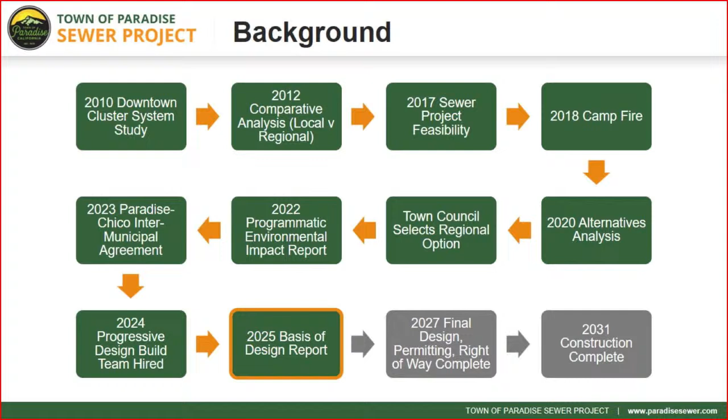At the December 10th council meeting, we provided a slide showing really the last 12 to 15 years of project development activities, bringing us to this 2025 basis of design report. For the purposes of introducing today's presentation, I'm going to spend some time on what brought us to this moment, in advance of hiring our PDB team and preparing the BODR.

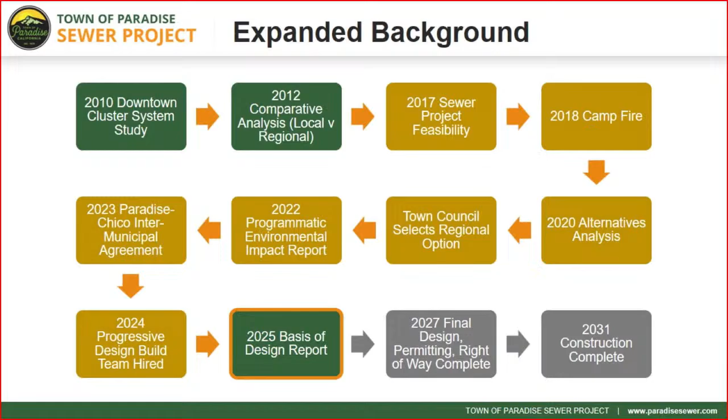For numerous years, we've been showing this slide to our funding partners and project stakeholders, City of Chico, Butte-Lafco, Butte County, to showcase just how studied and how important this project is to the Town of Paradise. For the greater part of the last 40 years, this has been our most important project in the Town of Paradise.

Some key definitions, so we're all talking the same language. The Paradise Sewer Project's overall goal is to provide a long-term solution for the collection, treatment, and dispersal of wastewater from parcels identified in the sewer service area. That sewer service area is described here by pretty much the areas encompassed by Clark Road, Skyway, and Pearson Road, mapped to the right here in orange.

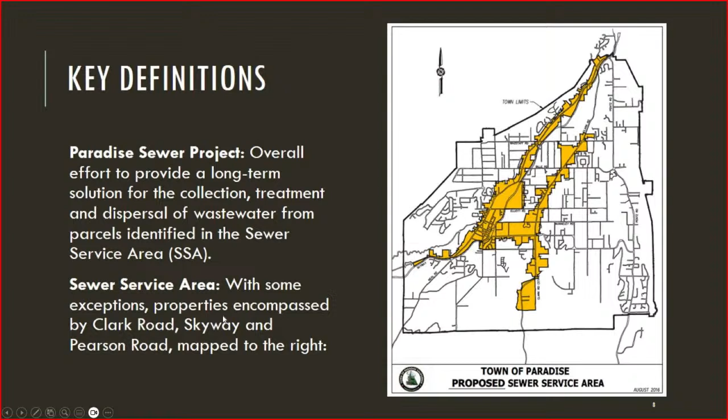Our goal was to determine a funding subsidy or grant from the state or federal level which was not currently advertised or available, to ensure the project could be advanced. The 2017 feasibility study outcome was to pursue both local and regional sewer project versions to maximize the benefit to the town at the lowest cost, even knowing we did not have a funding source identified or confirmed at that time.

A lot can be said about the 2018 Camp Fire, but in the lens of the Camp Fire and post-Camp Fire recovery, our community long-term recovery plan identifies the Paradise Sewer Project as one of the most critical projects affecting the long-term recovery of our community. It reaffirms the importance of this project to improve groundwater quality and environmental conditions, restoring affordable housing to Paradise, and removing a major barrier for commercial recovery.

With that in mind, in 2020 the Paradise Town Council voted to again undertake a review of alternatives, reconsidering a potential local versus regional approach in the post-Camp Fire lens for the project. The next couple of slides I'll summarize briefly. There's a lot of information, but that 2020 effort really does set the stage for how the project was evaluated and how we arrive here today.

The Paradise Sewer Project essentially has three different choices at its basis for how it could move forward: we either don't advance the project, or we utilize a local treatment plant, or we look at a regional connection with the City of Chico. Amongst those local treatment plant options, there are different types and methods to treat and dispose of the wastewater.

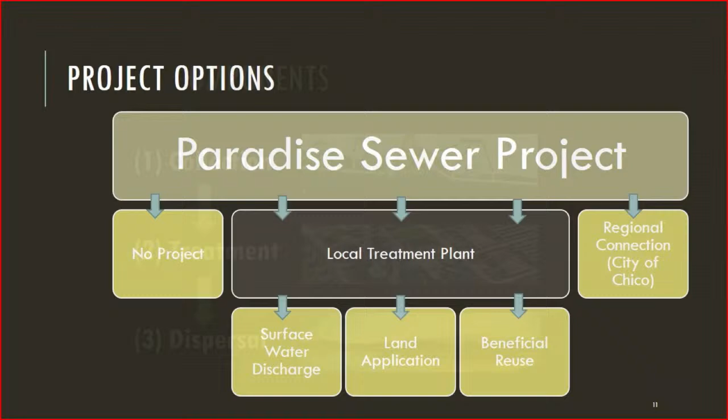With that, you have surface water discharge, land application, and potential for beneficial reuse. So what defines a complete project? It is one that includes the collection, treatment, and dispersal. Because the town of Paradise does not have any major water bodies within it, dispersal has always been a major challenge, which really did steer the project towards a regional approach with the City of Chico's water pollution control plant already in existence.

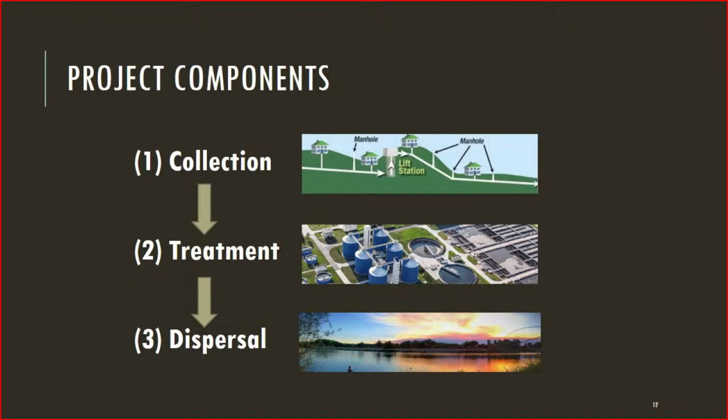Our 2020 alternatives analysis matrix looked at regional versus local from five different criteria: economic, social, environmental, implementation, and operational.

I'll summarize from the economic status. We looked at local, which we even described as the Miocene Canal alternative, a third alternative discussed about collecting and exporting the wastewater out towards the Miocene Canal. But really the primary focus in the two competing alternatives in this study was local versus regional. From the economic perspective, it was pretty close, but the regional option was more beneficial to the town of Paradise when you consider the long-range operations and maintenance cost of the project.

As far as the social impacts, what does that mean? It means impacts to the community during construction, or permanent impacts to the community, whether that be visual, noise, or odor, change in public recreational access, and then ongoing monitoring or mitigation required. The regional option scored the highest for this one as well.

When it comes to environmental benefits, regional was also selected as the preferred alternative, or at least the highest scoring criteria, because of the simplicity of permitting, potential to avoid resources, and predictability of obtaining a permit, as some agencies are more difficult and unpredictable when it comes to issuing a permit for new wastewater discharges, and that remains true today.

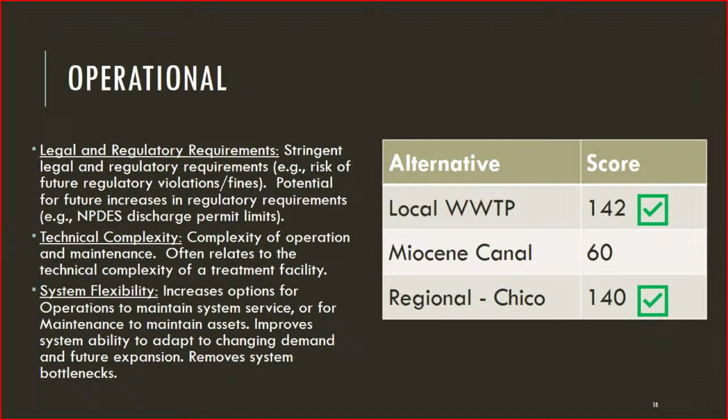As far as operational, both local and regional present pros and cons, as we've seen in the development of the EIR and information you'll see in the basis of design report for the regional option. Operating and maintaining a wastewater treatment plant, or leveraging an existing one, requires significant effort and responsibility in managing this wastewater. So in our 2020 analysis, it scored local versus regional as balanced or equal. When the ultimate scoring was tallied up and presented to the Paradise Town Council at the time, the regional option scored the highest, and that was the one selected.

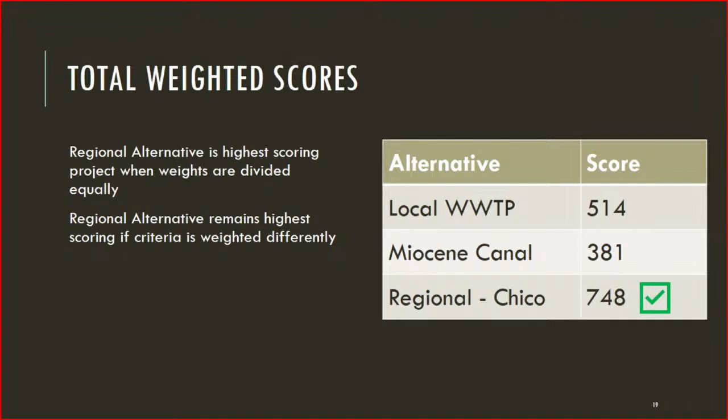The reasons behind that: it was the lowest capital and net present value costs, it had the lowest community impacts during and after construction, the least probable environmental impacts, and it was going to be the easiest to implement. As far as operational, it was least complicated to operate and benefits from potentially leveraging experienced Chico staff. This direction was approved by the Town Council in December of 2020.

So when it comes to next steps after that alternatives analysis, the Sewer Regionalization Project Advisory Committee was formed. This was comprised of the mayor and vice mayor at the time between the Town of Paradise and City of Chico. The role of this advisory committee was to develop the principles of agreement for the city to provide the town with wastewater treatment services. The committee was also purposed to monitor overall progress of the project, including the EIR process and the associated public comment periods, as well as provide updates and recommendations back to the two councils.

I'll note here, this was also facilitated by the Regional Water Quality Control Board, including involving Clint Snyder, who I mentioned earlier is on the call today.

As far as the accomplishments of that committee, they successfully supported public outreach as a complement to the environmental impact report. They approved the principles agreement between the Town of Paradise and the City of Chico, which then fed into identifying a connection payment to the City of Chico required to be paid from the town as compensation for the value of their water pollution control plant, as well as the capacity we would be requiring. From there, we approved the intermunicipal agreement, which was the City of Chico's way in their municipal code of how regionalization comes to fruition if they so chose.

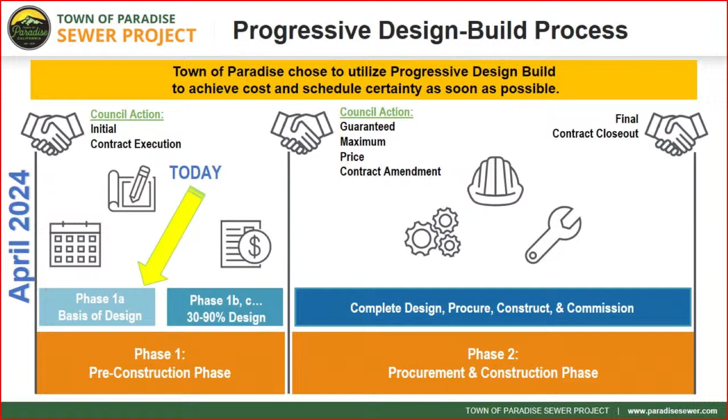With that, it is my pleasure to introduce the Carollo team again to present the findings of their basis of design report underneath the work completed by Mountain Cascade Incorporated. So with that, I'll introduce Randy Buckman.

Good afternoon, my name is Randy Buckman with Mountain Cascade. I am the project manager for the Progressive Design Build team. I'd like to start by thanking the council for having us here today and allowing us to present our findings in the BODR, and also thank the town staff, especially Jim Goodwin, Mark Maddox, and Colin Nelson.

Thank you for their support over the last year as we have progressed, not only entering into contract, as Scott knows, we were able to enter into a contract relatively quickly. I think it took us two months when usually this process would take four to six months.

And as Mark said, in a short period of 10 months, we were able to deliver the BODR. I'd also like to acknowledge the engagement from our project team partners and stakeholders: PG&E, the City of Chico, Butte County, and PID, as well as the people from the Progressive Design Build team who aren't here. We have a large number of staff committed to this project from both Carollo and Mountain Cascade, as well as our subcontract partners Fugro, Rolls Anderson Rolls, and Crawford and Associates. With that, I'd like to introduce Beverly Hahn, the Assistant Project Manager with Carollo, who will kick off the rest of the presentation.

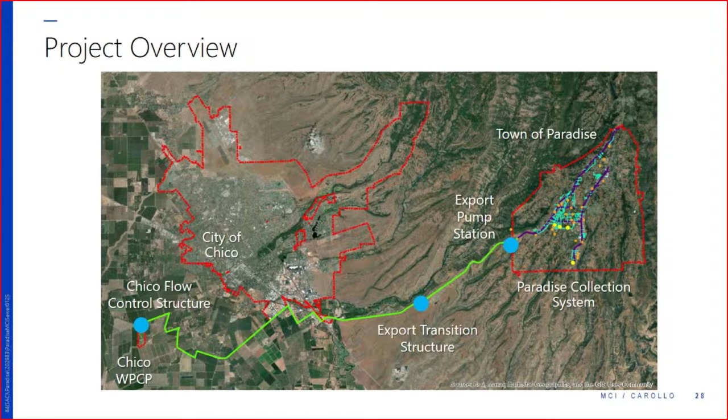So that creates a forced gravity system to the Chico plant, which is great because it avoids a lot of pump stations, but does create some design challenges since it pushes flow at a very high pressure to the plant. So at the Chico plant, there is a flow control structure that serves to reduce that pressure before it enters the plant.

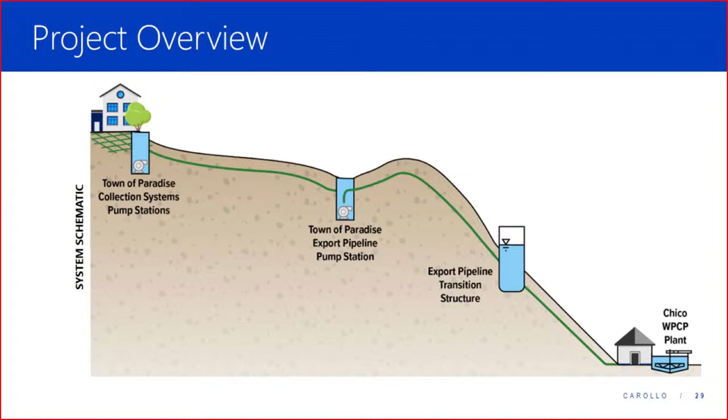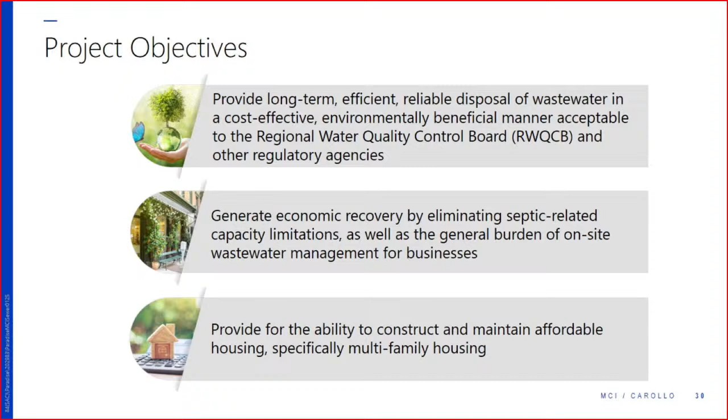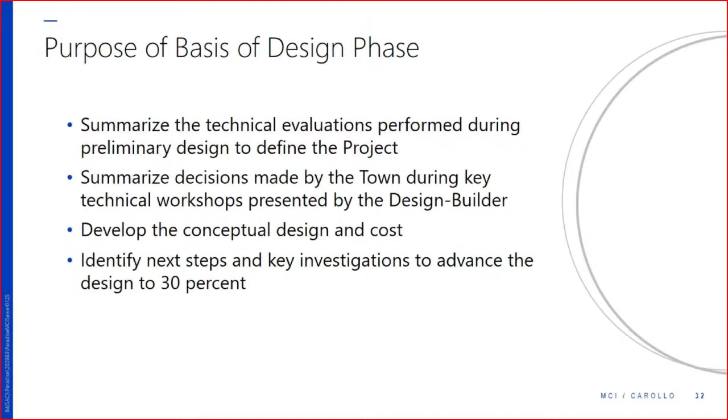Just a couple of quick highlights. We did start in March and wrap up in December, so it took us 10 months, which is kind of an expedited schedule for a project this large.

We had 2 parallel teams in place to make this happen so quickly, both with targeted expertise—one for the collection system and one for the export pipeline and Chico connection. Both teams worked closely together. Darren Bowney will talk about the collection system stuff, and John Marshall, who's not here today, led the export pipeline work.

There were 12 technical workshops with the town, tons of meetings, a bunch of field investigation effort, and some advanced hydraulic modeling. We'll talk about the collection system modeling—that model helped confirm in detail what kind of flow could be expected to enter the system, which sets the basis for our design. There was also a separate hydraulic model prepared to optimize the export pipeline configuration.

Development of key design criteria—Randy talked about the utility and agency. There was a lot of utility and agency coordination along the way, and then the updated construction schedule and cost estimate as part of the work.

So just a quick overview of the collection system. This graphic shows the conceptual design developed during the basis of design phase. The flow travels from high up on the hill along Skyway, north to south based on the blue arrows, and also down Clark. Then it's lifted from the bottom of Clark up to Pearson, where it flows across town over to Skyway. The collection system is made up of sewer laterals that connect homes to collector pipelines within the town.

Trunk sewers, shown in green, are the main primary pipelines within the collection system. Their job is to convey the flow down to the export pipeline, which is not shown on this graphic but is on the lower left side of the screen at Skyway.

The collection system consists of 29 small pump stations to lift flow from low elevation neighborhoods up to the trunk lines, and also about 4 trunk line pump stations, which are larger pump stations along the green pipelines. Their job is to lift flow into the trunk pipelines where the sewer flows downhill.

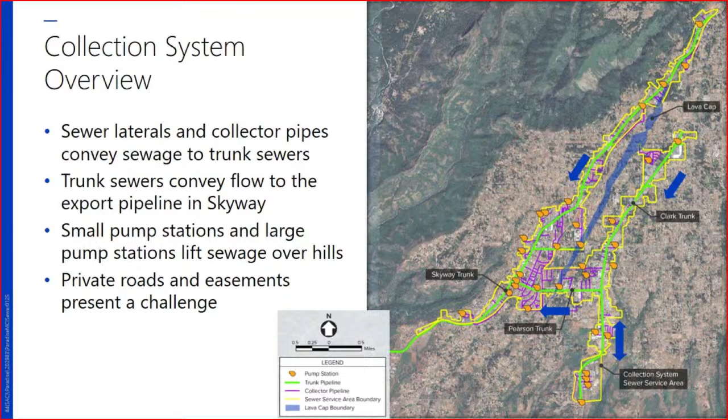So the sewer system collects flow from the sewer service area and conveys it to the export pipeline. This graphic in blue shows the sewer service area and the main pipelines throughout the town. The different colors show the diameter of the pipes within the system. The majority of the trunk pipelines are 8-inch diameter, with some sections of 12-inch and even short sections of 15-inch pipelines.

This is a result of our hydraulic modeling performed during the basis of design phase. As a next step, we would refine the pipeline sizes during preliminary design and optimize the pipeline design for cost, constructability, and all the other factors we're considering as we develop the design.

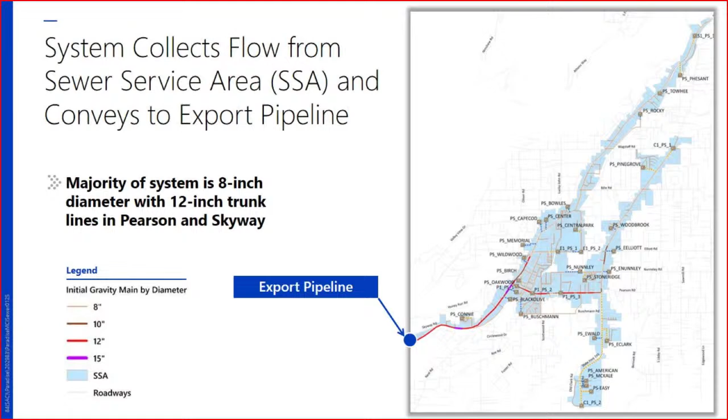So the baseline alternative presented in the basis of design report includes 4 trunk line pump stations. This image shows the lower portion of the collection system. The original concept included 3 trunk line pump stations, shown in red along Pearson, and 1 at the bottom of Clark. These are needed as the flow travels across Pearson—there are several hills, so there were trunk line pump stations at the bottom of each hill.

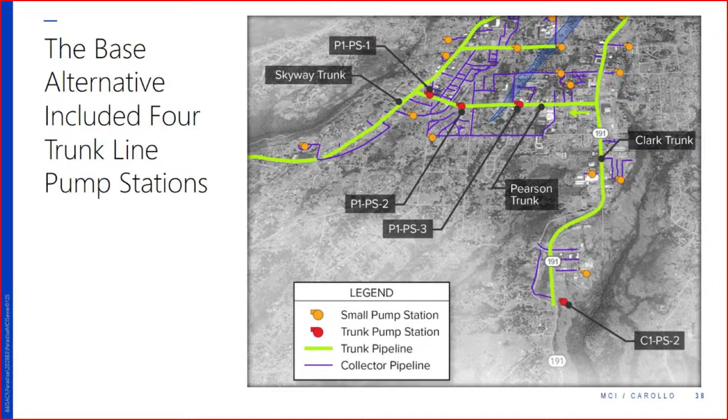As we developed the conceptual design of the collection system, there was an alternative that stood out and really optimized the system for the town—the Pearson-Buschmann alternative. It has a primary advantage of eliminating 2 trunk line pump stations. This graphic shows how flow would split along Pearson and flow towards Buschmann, down Academy Drive, and then to a pump station at the bottom of Buschmann, shown in orange. This is very advantageous for the town.

It saves long-term O&M and cost and siting of those pump stations. This needs to be confirmed as a next step based on existing utilities in Buschmann and other design things we'd be looking at for actual design of this system. The final decision hadn't been made yet as to implement this idea.

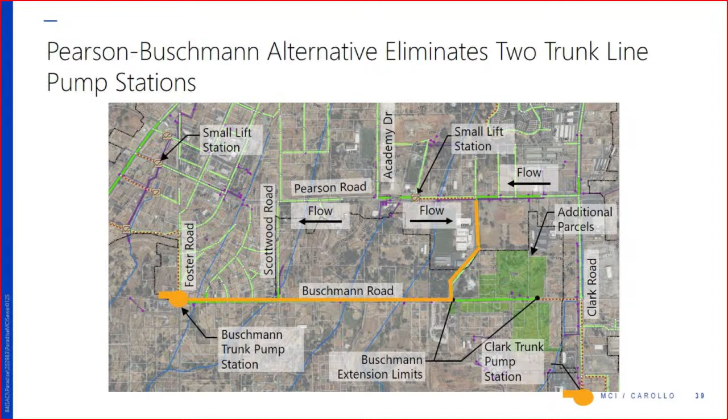So I talked about the trunk line pump stations and small pump stations within the town. This graphic shows a schematic of the trunk line pump stations. The image on the left is an engineering drawing of a site plan. You can see the green lines coming into the pump station.

From left to right, the larger pipeline is a gravity pipeline coming along a major route, anywhere in the town where this might be located. It flows by gravity into the pump station where it's lifted, and then turns into a force main, so it's under pressure, and we pump it up the hill or wherever it needs to go to flow back by gravity. In the preliminary design, we had either 4 of these trunk line pump stations or 2, depending on the alternative that is selected.

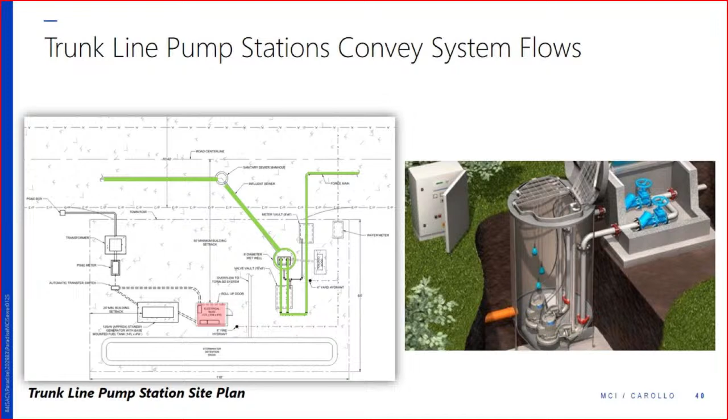The recommended alternative also includes 29 small pump stations, and these small pump stations lift wastewater to the trunk lines. They're needed for low elevation neighborhoods or groups of houses. You can see the small pump stations in this graphic in orange. They're kind of where the topo falls off the hill nearby the SSA. We're working very hard to optimize the number of these and reduce the number of pump stations as we develop the design.

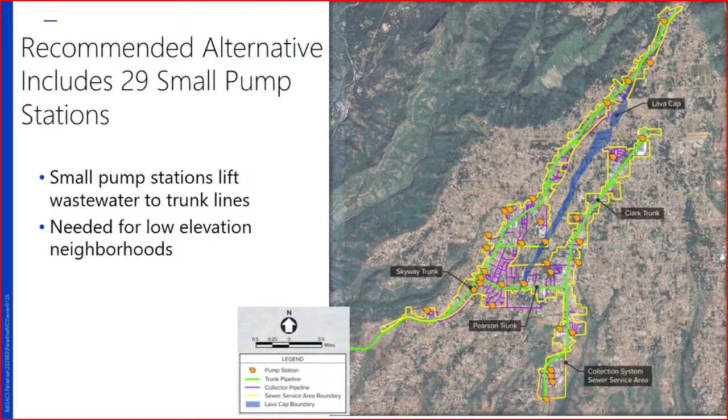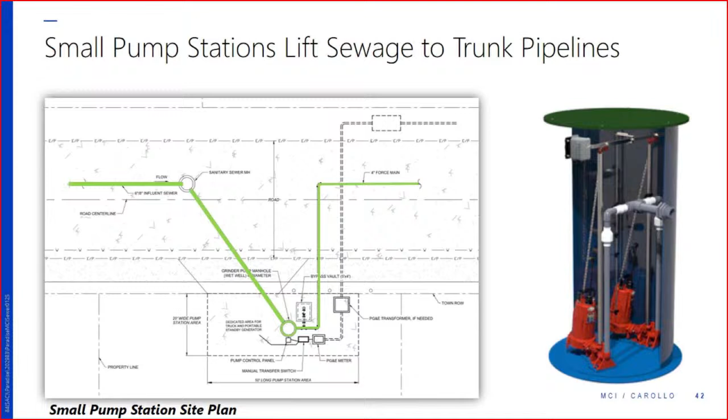So the next topic is hydraulic modeling. We performed hydraulic modeling of the collection system during the basis of design phase. The purpose is obviously to size the facilities, both in the collection system and the export pipeline. The collection system hydraulic modeling was based on land use elements within the SSA.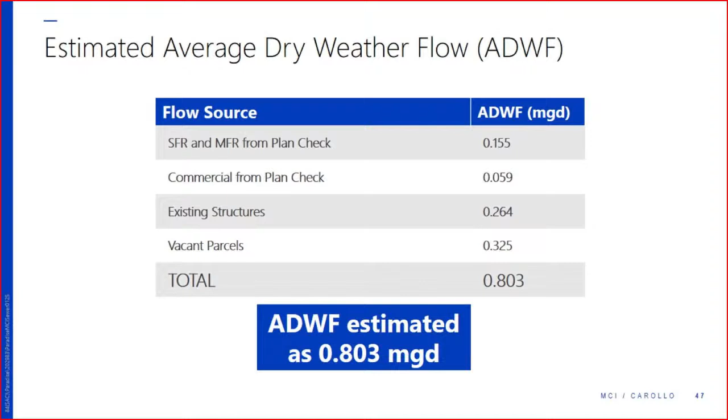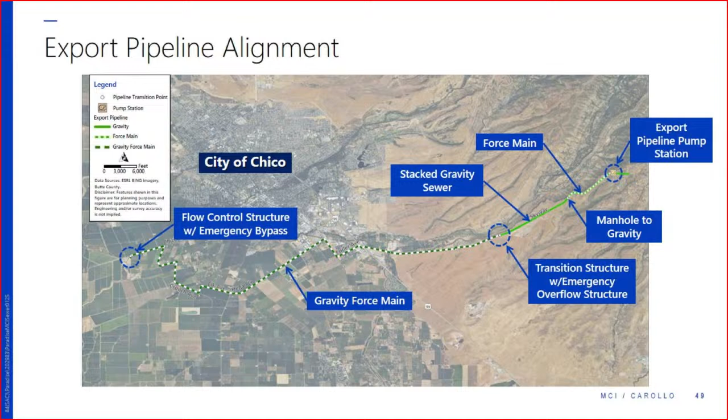There are several trenchless crossings along the export pipeline. Trenchless crossings present challenges during construction and are unique in pipeline design. Butte Creek, Highway 99, UPRR, Comanche Creek, and Little Chico Creek are the trenchless crossings identified during the basis of design phase.

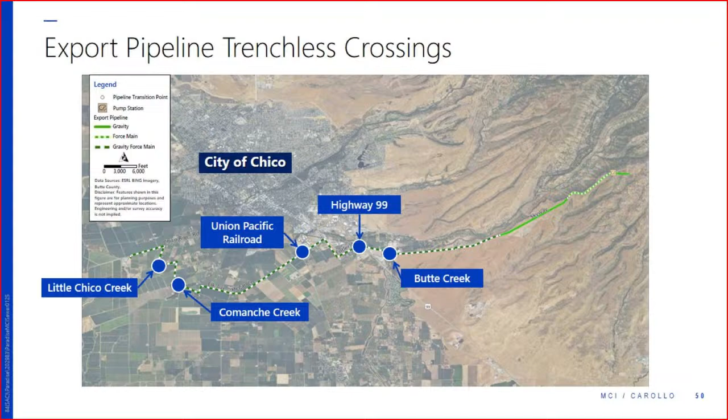It would likely be a 1,600-foot length crossing and tunnel about 50 feet underneath the creek. There are different methods, and we need to look at the geotech conditions at this site to determine if that is absolutely feasible or if other methods would be needed. Certainly permitting at these types of crossings is a challenge, but we had developed permitting strategies with HDR's help during the basis of design phase.

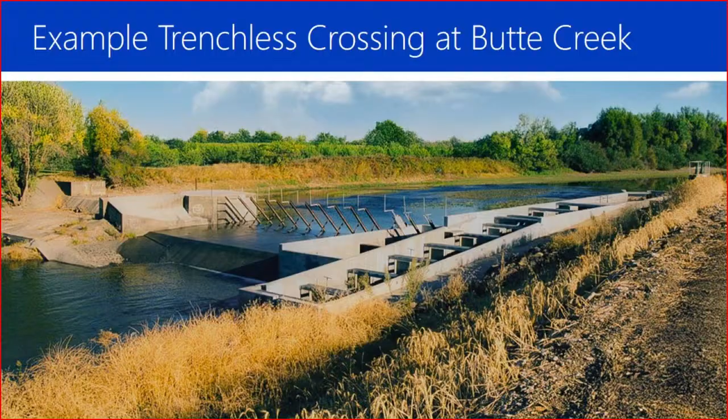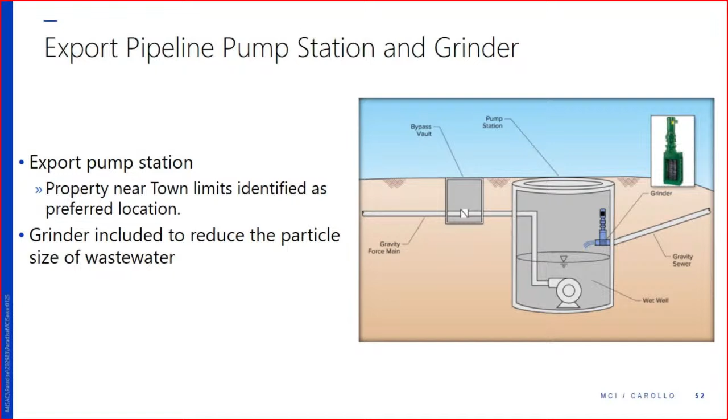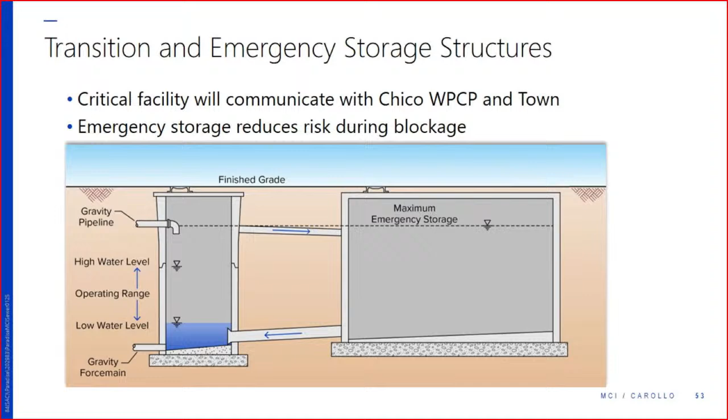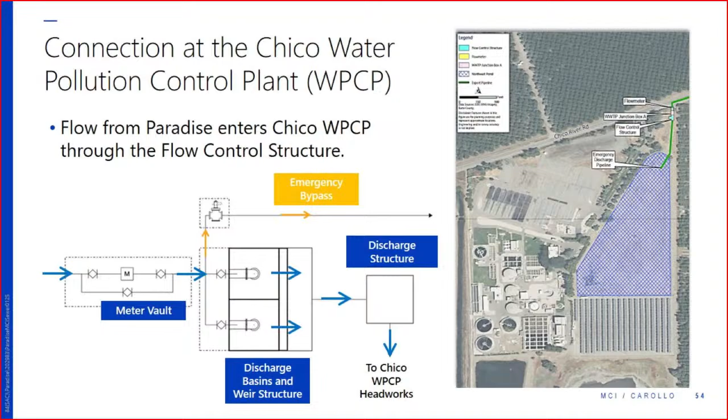Okay, and with that, Ed's going to talk about field investigations.

Thank you, Darren. I think we're almost there. So one of the first field investigations I'll talk about is a topographic survey, and this was broken up into phases. First of all, topographic survey is really important for hydraulic evaluations and locating facilities, including the depth of the sewer collection system itself and pump stations. It's also important for right-of-way and design.

So the first phase, we did use PG&E LiDAR data that was received. It took a little while to make sense of it, but we did get good information out of it, and we were able to use it for the collection system preliminary layout and also for the hydraulic modeling of both the collection system and the export pipeline.

This phase also included topographic survey of the trenchless crossings, which were an expedited design portion of the work. It was important for the evaluation of these crossings and for understanding the permitting and geotechnical borings that would be required for that work.

Second phase we started is currently on hold. That included the detailed topographic survey of the export pipeline and the collection system in town, narrowed down to a prioritized collection system area.

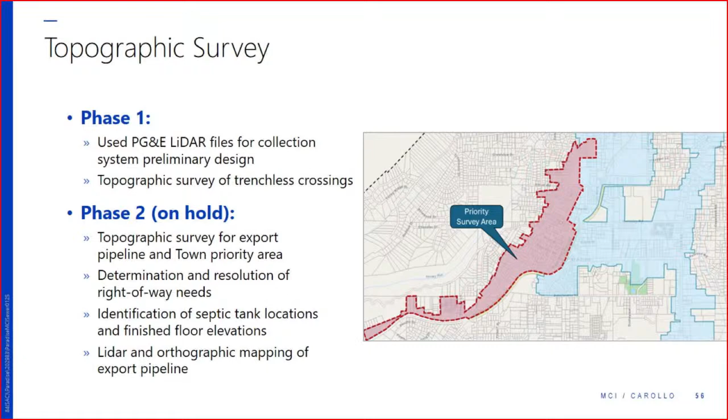We also completed a desktop geotechnical study of the geological, geotechnical, and environmental conditions for the project. This really did help us confirm the extent of the varied geology throughout the overall project.

The project encompasses a very large area with differing elevations, and we found, as we expected, a real varied geological situation between the town, which has kind of a volcanic cap with boulders along the way, and varied through six different geologic areas until we get to Chico, which has fine grain alluvium with a buried cap.

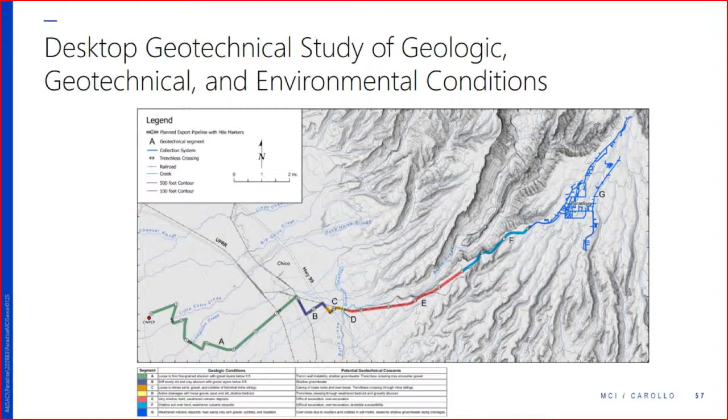Some key findings from the desktop geotechnical study show, as expected, cobbles and boulders in the subsurface. We expect those along the way, and this did help us identify where the majority of those issues would be found. Those do pose challenges to trench excavation.

We also determined the groundwater elevation, also as expected, about 5 to 15 feet below ground surface. That also creates construction challenges similar to the boulders.

We also summarized some of the hazardous materials risks identified along the path between the town and the Chico plant, including soil and groundwater contamination that could occur due to the septic situation over time, and some heavy metals and other things that could pose challenges for various reasons.

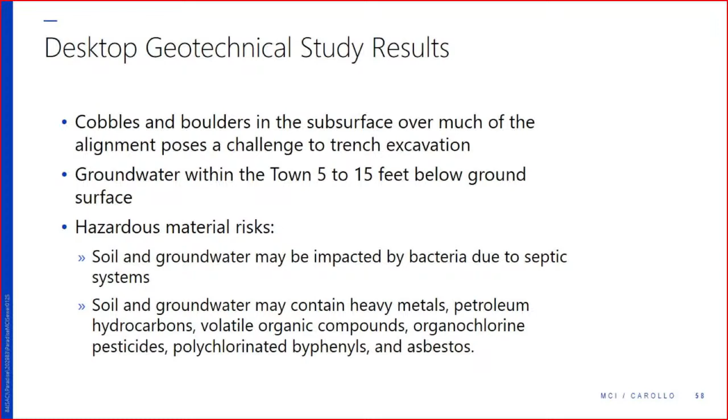A key step to this work will be the geotechnical borings for Butte Creek and Little Chico Creek crossings, and those do require U.S. Army Corps 408 permits, which were part of the work included in the basis of design and would be a future task should this portion proceed.

So that's the next key step that was identified as the next step for final design.

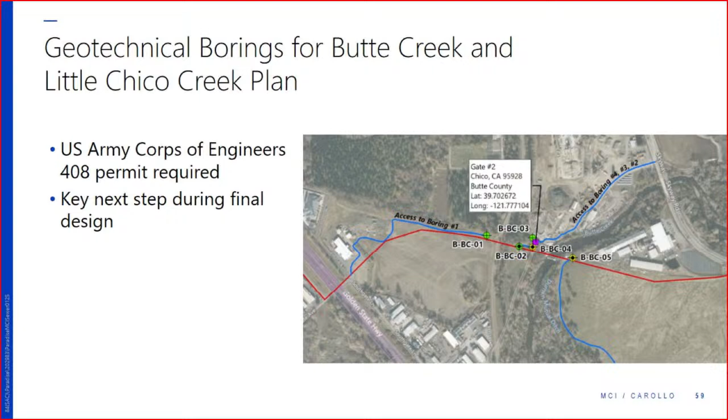Finally, another piece of field investigation work we completed during the BODR was putting significant effort into understanding how to do cost-effective geotechnical investigations for this project. It's such a big area, and putting geotechnical borings all over the place would be very expensive and intrusive. So we worked to find good solutions that would provide good data for design without having to undergo all of that.

This includes electromagnetic and ground penetrating radar to identify the thickness of the overburden soil. It would also include seismic refraction surveys every 3,000 feet along the trunk line and at each pump station, spread throughout the town, which would help us understand where the geotechnical borings need to go. This creates a situation where we'll have test pits and limited borings at key locations.

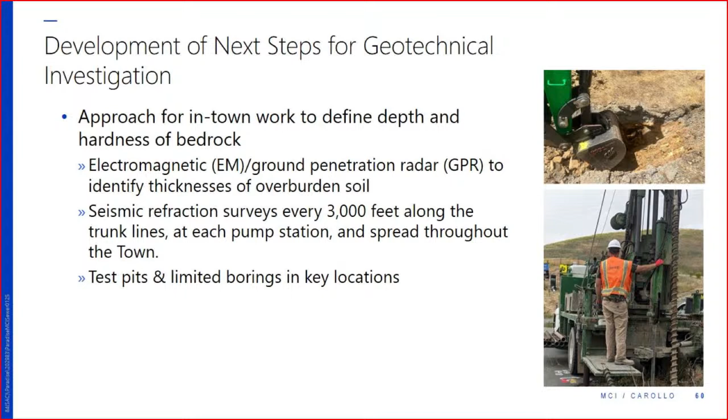The next module, and I think the last module, is our discussion about the operation and maintenance evaluation.

There are several facilities throughout the design that would require O&M: pump stations in town and along the export pipeline, gravity sewers throughout, manholes to access those gravity sewers within town and along the entire export pipeline, O&M at the transition structure, and O&M required at the influent facilities at the Chico plant.

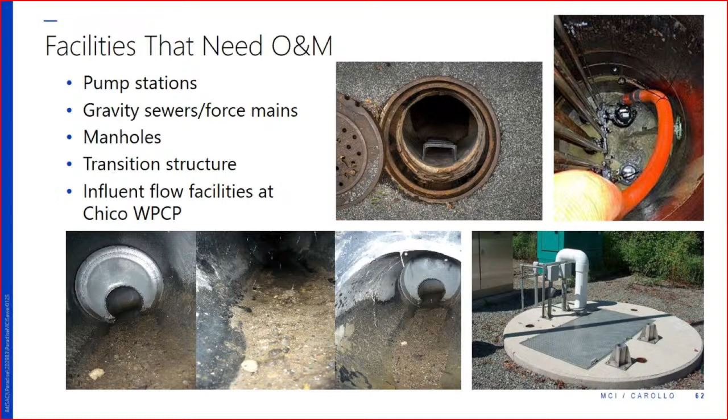We evaluated 4 different key alternatives for how this O&M would be implemented long-term. One was that the town would operate and maintain all facilities. Another alternative looked at the city of Chico operating and maintaining all facilities. A third alternative looked at the town hiring a third party, not Chico, to help with the operation and maintenance of those facilities long-term. A fourth alternative was a multi-party operation.

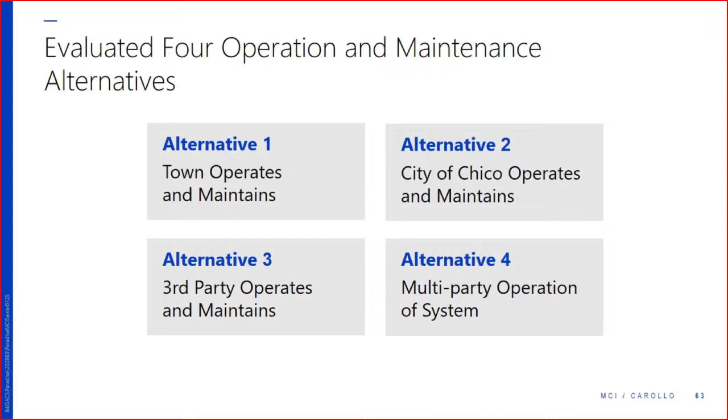We looked at all of these in terms of cost, risk to the town, implementability, near-term and long-term. The recommendation resulting from the basis of design is a multi-party operation and maintenance plan where a sewer system supervisor and the town would manage overall supervision. The town would hire a third-party contractor to do trunk and collector pipeline CCTVing and jetting O&M activities, while the town would operate and maintain the pump stations, the transition structure, and the facilities at the Chico plant. There was also discussion about the town having help in the near term as facilities are commissioned and turned over, but the ultimate goal is for the town to maintain operation of the majority of the facilities.

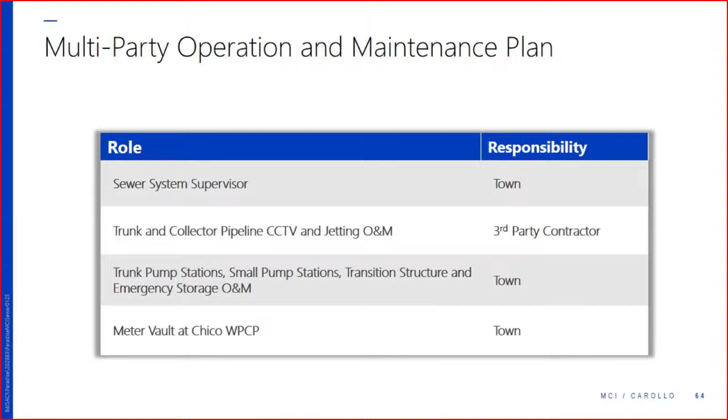And with that, I'll hand it back to Randy. All right, last slide, I promise. So as you've heard, we gave you guys a lot of information. It was 10 months worth of work and hundreds of pages of a document that we spent 2 days with town staff on, condensed into 20 minutes. So it's a lot of condensed information. But where that puts us now, as Beverly mentioned, we worked in parallel during this entire time.

One of the paths we didn't mention was that we had an estimating team working with us at the same time. So as we were going through the BODR, finding and discovering and peeling back the different layers of the project, our estimating team was working on getting real-time, today estimates, which is how we got our projected construction costs in today's terms—talking to vendors, pipe suppliers, pump station suppliers, things an owner typically doesn't have available to them in a traditional design bid build process.

So where that puts us today is that we finished the BODR. From an engineering perspective, the collection system really hasn't changed. When the town decides to proceed, all that engineering work still had to be done—the model needed to be done, the surveying needed to be done. It's all things that are going to be useful to the town today and going forward, whether the collection system is smaller or built out in phases.

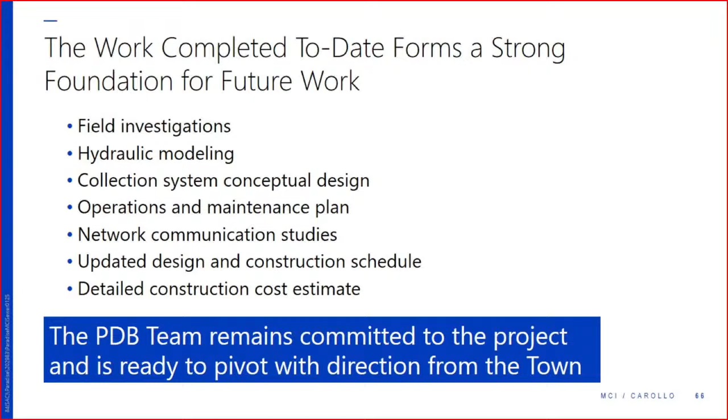Going forward, Mountain Cascade and Carollo are prepared to make these changes. We're prepared to work with the town to do what's in the best interest of the project, as I tell everybody when we started—let's always keep what's in the best interest of the project in mind. That means everyone involved, all of the stakeholders, making sure the town gets a system that not only they'll benefit from, but that they can afford. So I appreciate your time today. Thank you very much, and I'll turn it back over to staff.

Yeah, thank you, Randy. When he said last slide, that was the last slide for him—I still have more. So moving right along, I have a couple of slides here that show the different actions being requested by council today, but I'm not asking you to address them now. This is the first one on the list, where we are asking you to concur with staff's recommendation to accept the BODR prepared by Carollo and the Mountain Cascade team.

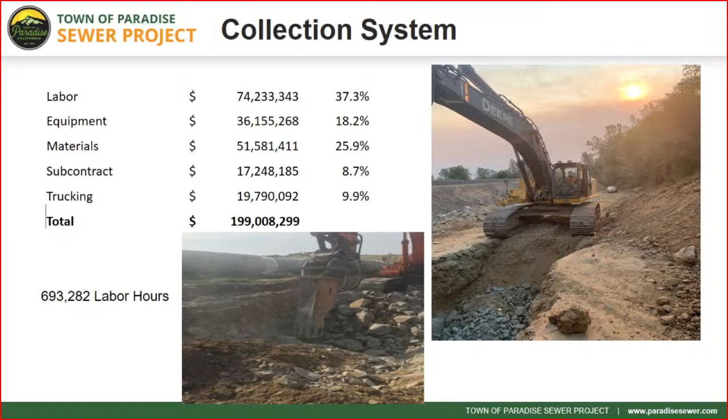As we move forward, we'll get into modifying the project objectives, and now getting to project cost. Here are some slides about the project cost that Randy was just speaking to, putting pen to paper and estimating the overall project cost. For the collection system itself, the current estimate is about $200 million, and fascinatingly, almost 700,000 labor hours to build it. For the export pipeline, about $80 million and about 170,000 labor hours—pretty fascinating as well.

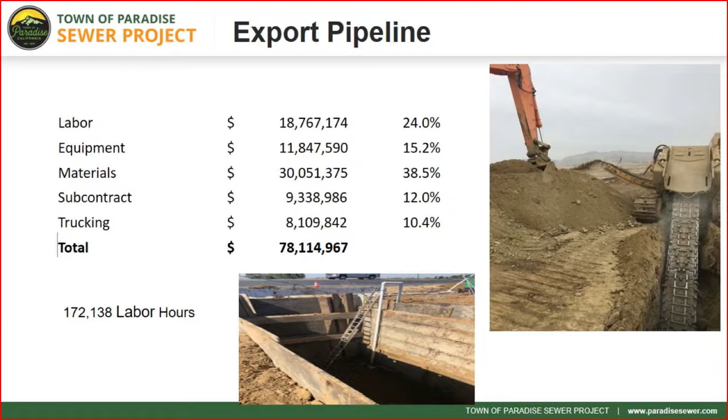As far as opportunities—meaning potential for cost savings—and risks, meaning potential for cost increases, this team did a great job laying out menu items we could look at and risks to be aware of. Leveraging and potentially reusing project spoils, importing aggregate base versus off-hauling spoils, flagging the project for traffic control at $12 million, and possibly using a different material type like ductile iron pipe for the force main. Other potential savings include force main cleanouts and our current plan to include fiber in the gravity collector trenches. As for risks, the tunnel crossings you heard about total about $21 million combined between those five.

As far as county road reconstruction, the town is very familiar with making sure roads that are recently paved are restored to a pre-project condition. The county has the same standards, and we're aware they've recently repaved portions of Skyway, as well as Hegan and I believe Midway. So there's a lot of road rehabilitation work to be completed, let alone within the town of Paradise as well. And not knowing the full complement of utilities or abandoned utilities under these roads, those will continue to be a challenge and risk for cost increases on this project moving forward.

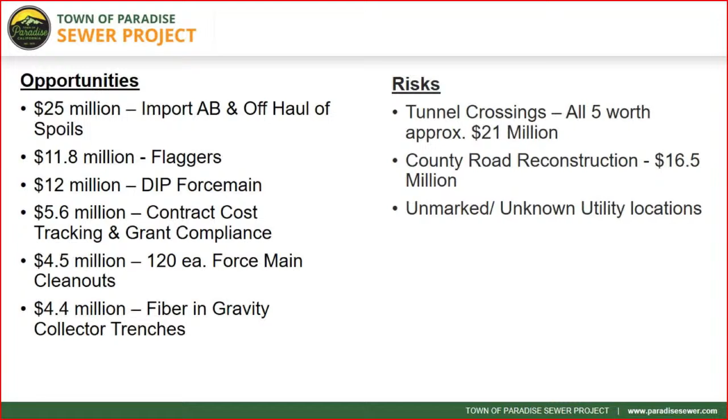You saw this slide at the December 10th council meeting where we asked HDR to develop a cost estimate to complete the work from this moment today to commissioning a regional project. When we saw the numbers had increased to this level, where we're looking at a construction cost over $350 million and a total project cost well over $400 million, we needed to reanalyze whether this project is financially feasible as currently envisioned.

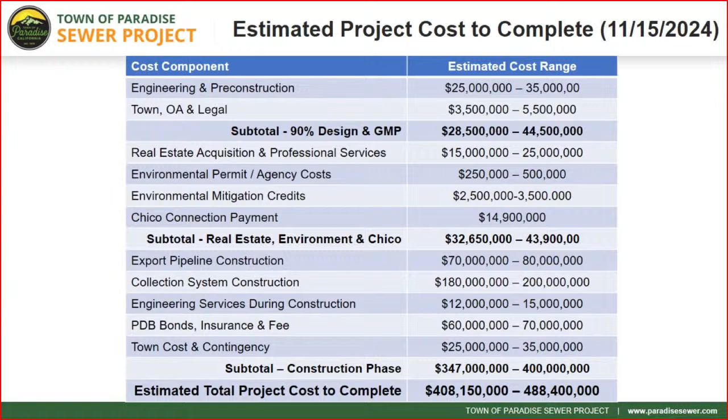Here's a comparison of the project estimates, and I'll be the first to state that each of these iterations really isn't like for like, but they're close. In 2012, an engineering report really did say we could build the sewer project for $29 million. With what I know today, there's no way that was possibly true.

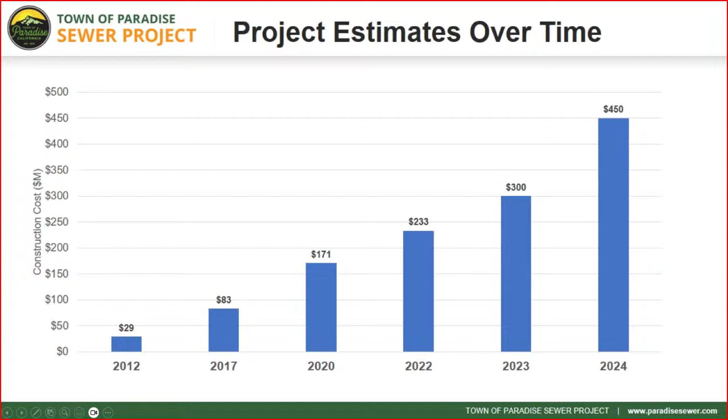What I really want to highlight is what did we learn between 2023 and 2024. I think you heard a lot of that today already in the development of the BODR, and the BODR informs those project decisions that affect project cost. But above that, and above inflation and all the other things that have occurred to our global economy that affect the project, we have finally been able to engage with a contractor that has experience working in the actual conditions of Paradise. We are the furthest along in those 50 years of project studies, the furthest along this project has ever been to actually building it. So with that information, advancing the BODR and getting close to design, this is the best information to have an accurate estimate of what it costs to build it.

That doesn't mean we have to like it, though.

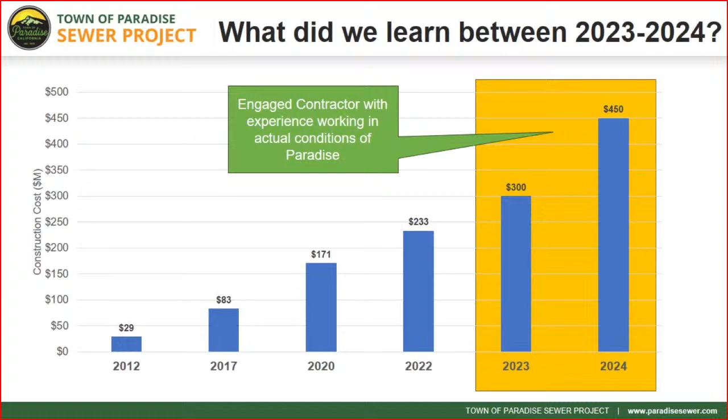Obviously the project is very costly, but when you take a step back and look at the project by the numbers, you see this list: 365,000 linear feet of pipe, almost the same distance as from the town of Paradise to the Sacramento International Airport. That's a long way to go, built at an average trench depth of at least 5 feet deep. 365,000 linear feet, almost 900 manholes in the collection system, 32 pump stations and structures, 5 trenchless crossings, 500,000 tons of base rock, 123,000 tons of asphalt for road rehab, and almost 1 million hours of labor to build this.

If we'd said 8 months ago that we'd come up with this set of stats about the project and that it would cost over $400 million, understanding what the economy is and the cost of construction, that number probably would have shocked all of us at that point. But with the BODR complete, we have information today that we did not have beforehand.

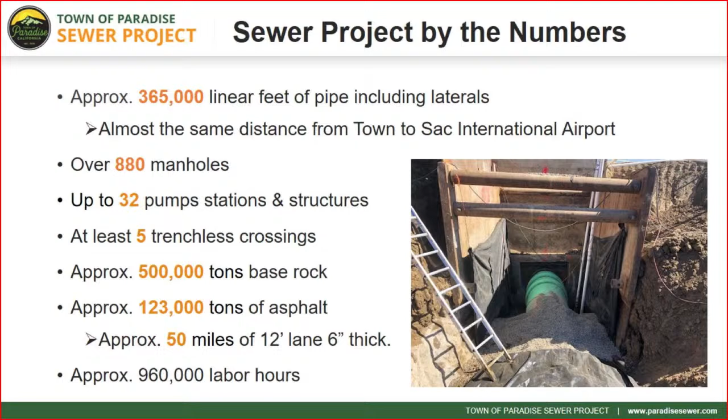So with that, I'll transition the presentation to our funding pursuits that are expected to match. As I mentioned at the kickoff of this meeting, we do not have enough money to build this project on our own forces. We have to do this together with someone. We're working with a lot of different agencies, and have been for a long time, to try and do something that hasn't ever fit neatly into a grant program: building a new wastewater treatment plant. These programs that exist are largely for expansions, or working together on a minor upgrade or extension of an existing collection system. We are trying to put the first foot of pipe into the ground and get that wastewater treated somewhere.

Our ability to secure funding has been a combination of USDA funds, HUD funds through the CDBG-DR program that was really only made possible by the 2018 Camp Fire, US EPA through congressionally directed spending of $1.75 million, and of course the State Water Board, which has been instrumental in our feasibility studies and a portion of our environmental document to get through that phase.

As far as funding opportunities reviewed, we've been looking at FEMA PA, the FEMA BRIC program, US EDA, USDA again, and the US Army Corps of Engineers.

I'll have more on that in a little bit. And of course, still the State Water Board, and then looking at federal and state advocacy efforts as well.

As far as the U.S. Army Corps of Engineers, this is relatively a new program. I'll highlight it again, just like I did last month, where this is a partnership-based program, where U.S. Army Corps can be a lead agency on a segment of work towards a project. We've had an initial consultation. There's potential for a $50 million allocation that works through Congressman LaMalfa's office, as well as an appropriation that's been made, but is not necessarily an obligation at this point. But we do believe this is a promising avenue to advance the project forward, especially if we were to look at the wastewater treatment plant moving forward.

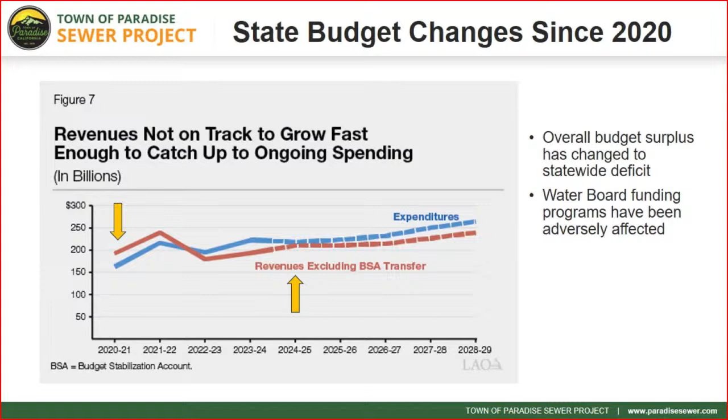And then, again, highlighted last month, but I'll say it again here, from the time we started to look at regionalization to where we are today, the state's financial situation has changed drastically from a surplus to a deficit, and no program across the state has been spared, including the Water Board and the Septic to Sewer Conversion Program.

But one thing that is new is that California Prop 4 did pass, and we are still working with the governor's office and our state lobbyists to see how the town of Paradise can try and reserve a portion of that funding, or advocate for funding to be directed from this program to the town's Paradise Sewer Project. We will be working tirelessly on that until we have more answers for you.

So with that, I'm getting ready to hand it over to Clint Snyder to join us virtually, but I'll take a quick moment to summarize the work that they have done. Clint specifically has participated in the Paradise Sewer Project since 2020. Originally, the Regional Water Quality Control Board did engage and participate in our Phase 1 environmental analysis. That goes back to the scoring criteria I talked about, where we selected regionalization with the town and HDR. They performed their own independent analysis of the town's potential avenues forward. They recommended the town advance the regional option with the City of Chico, and they facilitated the sewer regionalization project advisory committee I discussed earlier as well. They've been wonderful to work with as a liaison in our ongoing cost analyses and our funding opportunities with the State Division of Financial Assistance through the Water Board.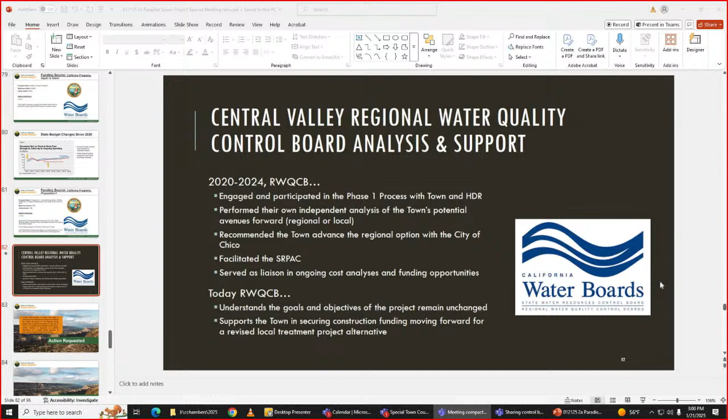Clint, would you be so kind to summarize your role in the project and where we've been and where we're going moving forward? Yeah, absolutely. Thank you, Mark. Good afternoon, Mayor Crowder, members of the board. My name is Clint Snyder. I'm one of the assistant executive officers here at the Central Valley Water Board, and I manage the board's Redding office.

I might just start by saying that we have been involved with the Camp Fire almost from day one, not just with regard to the sewer project, but the wildfire response and recovery through the hazard debris and hazard tree removal, then onto the North Complex fire, the Dixie fire, and most recently the Park fire. I say that so you understand we've been there through all of those things, ground up, and that work sort of extends to what we're trying to do here with the sewer regionalization project.

As Mayor Crowder knows, we were there when the idea was put forth to start talking about sewer collection and treatment system options. We spent quite a bit of time working early on to identify what options were available to update the 2017 feasibility study, accounting for the losses in the town of Paradise through population and homes, revitalizing that feasibility study to account for all of that, and then taking this next step of now what? How do we respond to this?

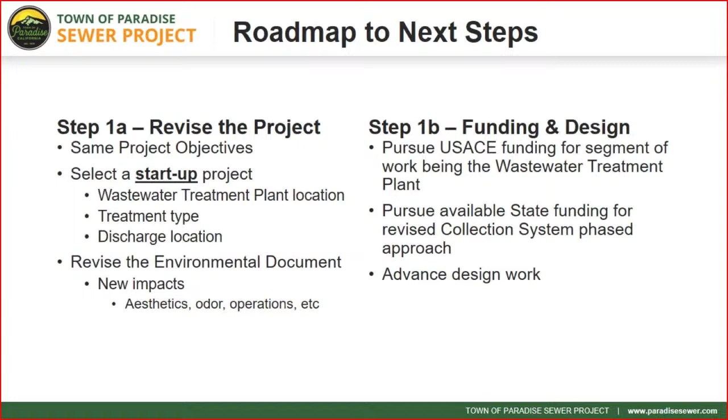So what does that look like moving forward? Step 1A is the project alternatives we plan to bring back to the council, with more information here in a moment as a preview. This includes information on project alternatives - really three distinct alternatives that differentiate individually in quite a few ways - covering treatment process and technology, discharge location and method, estimated user connections, project examples of where it's been done elsewhere in the state, and estimated total project costs between these alternatives, comparing them amongst each other to provide the council adequate information to make a selection to move forward.

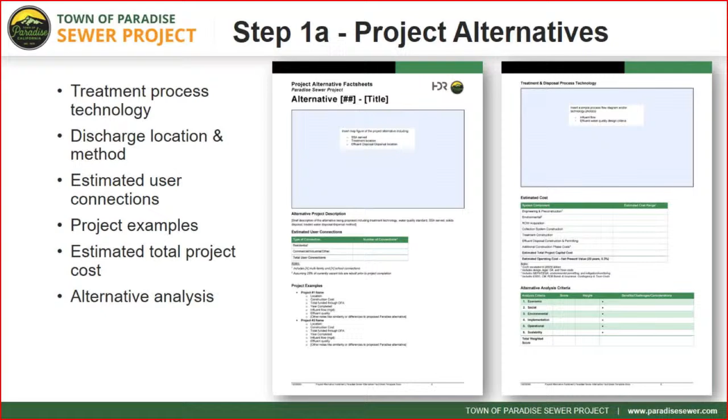So here is what I would describe as a preliminary preview of three alternatives: one Skyway, one Neal, and then one Clark. These are all just conceptual in nature. They could be scaled up for more parcels if our budget or funding would allow, or they could be scaled down. But ultimately, we need to find a wastewater treatment plant location and discharge methodology.

And from there, the information from the BODR and the collection system can again be scaled up or down to match what we are really hoping for, which is a design-to-fund or design-to-build-and-fund approach on the project.

This first option really does try to leverage a lot of efficiencies in the vacant parcels in the downtown commercial core and Paradise High School. We've heard a lot of feedback about existing businesses and schools waiting on this project to be completed as quickly as possible. This hits a few objectives as far as the state's priorities with residential connections over commercial, but it could also provide opportunities with EDA to potentially review more commercial connections they might be interested in partnering on for the project. So this is a well-rounded approach that I'd say has the biggest risk factor of a more local - and I mean local - wastewater treatment plant.

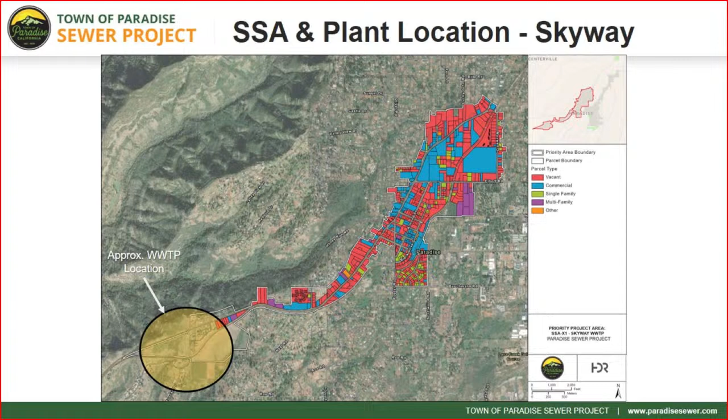As far as the next alternative, you'll see in the bigger part of the screen a zoomed-out view of Paradise, with a similar collection system to the previous one but maybe a little smaller, accounting for this base project requiring a similar export pipeline to what was discussed for regionalization - but a much shorter distance - to get down Neal Road to potentially look at a treatment plant near the landfill, or somewhere further out of town where you don't have the same impacts of residential neighborhoods or a gateway into town having a treatment plant sited within a visible area. This option can also be reviewed with the sewer service area scaled up or down accordingly.

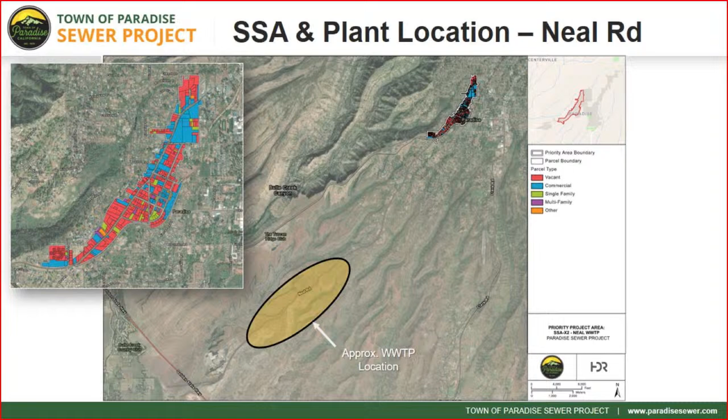The last option, if the council or community had interest in advancing a project location that served the Clark Road corridor first, is one where the parcels originally included in the SSA between Wagstaff and Lower Clark could be included, with maybe a wastewater treatment plant sited in the vicinity of vacant land near Paradise Community Village. That's again just one option to look at.

But amongst all three of these, the same factors I discussed earlier about treatment type and discharge apply - how we handle that effluent, because the two byproducts of wastewater treatment are solids, which are usually landfilled or used for some other beneficial reuse, and effluent, which can also be used for irrigation if there's a market for it and an appetite for the cost of redistributing that water.

Those two things have to be decided at all three of those locations. And as I share with you these maps, none of those decisions are set in stone or even known at this point, but we are most eager to determine that so we can move forward as quickly as possible.

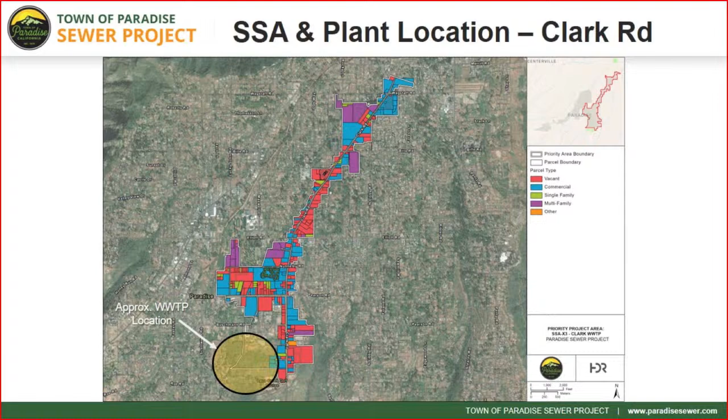Now getting close to wrapping up the presentation, I mentioned earlier a lot about the Sewer Regionalization Project Advisory Committee. The accomplishments were noted and the purpose was fulfilled. But at previous council meetings, there's been discussion about the desire for a new ad hoc committee, and here is some thoughts about what the role of this committee could be.

With the change anticipated in project direction, staff believes it is critical for the town council to follow, develop, and support closely. An ad hoc committee will provide an avenue for staff to meet at regular intervals with the two council members appointed to assess opportunities for potential action. The project team would report more frequently as this progresses to the entire council. Once appointed, staff and the committee will determine a meeting schedule and format to ensure an ongoing review and engagement in this new direction for the sewer project.

So lastly, this third action item on the agenda summary here and this presentation is to appoint two council members to serve on this ad hoc committee, replacing the previous SRPAC between the Town of Paradise and City of Chico and Regional Water Quality Control Board.

So getting to a summary of the presentation, about an hour and 15 minutes, we are asking council to concur with our recommendation to accept the BODR, to provide direction on pivoting the project towards a local wastewater treatment plant and everything that goes with that, and appointing two council members to serve on an ad hoc committee.

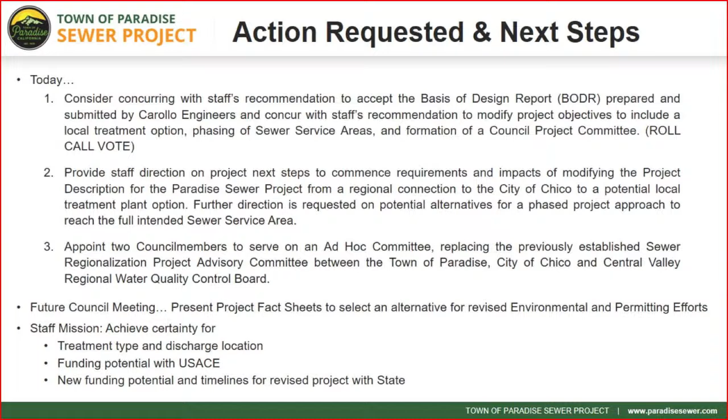But with that, I'm really, really confident about our potential moving forward, and that we had to investigate the regional option when we did. That way it no longer exists in the background as something nice that sounds great - now we can officially say that it's been fully explored and it's just not going to work.

But with that, our commitment and our desire for the community is, again, as was stated numerous times, in what's best for the project, which is what's best for the town, which is what's best for our residents. And so I'm really excited about the potential for this project moving forward. I'm really proud of the team that has put in all of this effort to get us where we are today, and so with that, I'll leave it to the council and the community for questions.

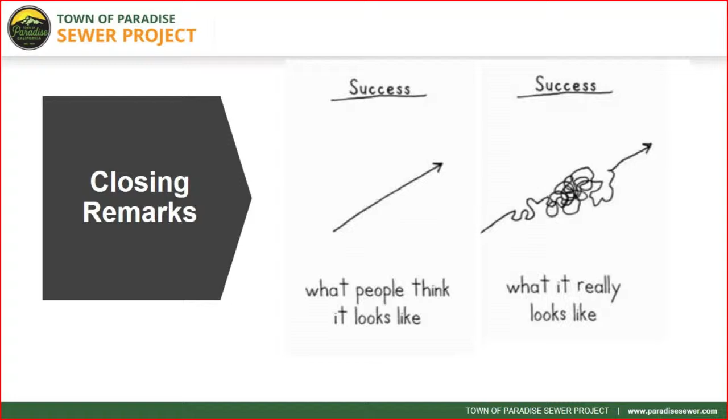Well, I think council's got a lot of questions, and I think we'll start here to address each issue 1, 2, and 3 in order. So whoever'd like to start.

One of my first questions that I've been looking for a little bit of clarity on is in all of the information that was contained in that 800-plus page report, I wasn't able to isolate a clear consolidated statement of the overall costs that demonstrated how we went from the $300 million price tag that was referenced at the September presentation at the council meeting to the November 15th-ish jump to $460 million. So I very likely could have missed it, but I went over that quite a few times.

So for the costs, we have a division of labor for the project, and the basis of design report did not include an update of the construction cost model. That construction cost model, you heard Randy discuss that a little bit. It's not included in the BODR intentionally, because the basis of design report is what informs that construction cost model. So if we were continuing with the project as currently visioned, the BODR would then be translated to an engineer's estimate on the construction cost.